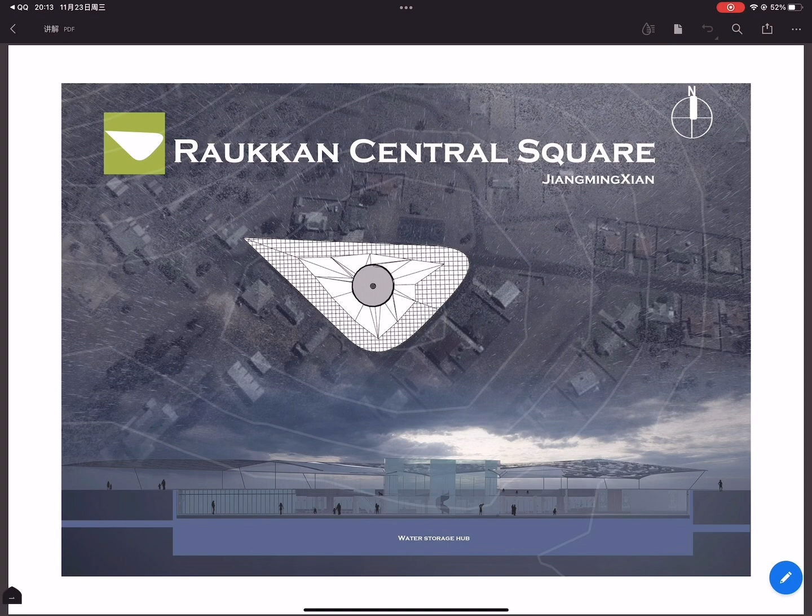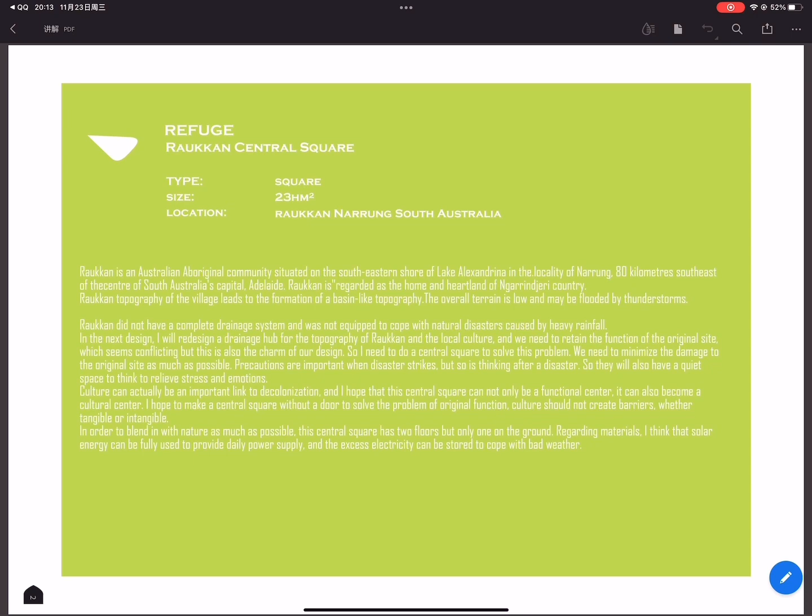Raukkan is an Australian Aboriginal community located on the southeastern shore of Lake Alexandrina, 80 kilometers southeast of the city centre of Adelaide, the capital of South Australia. Raukkan is regarded as the home and heartland of the Ngarrindjeri country.

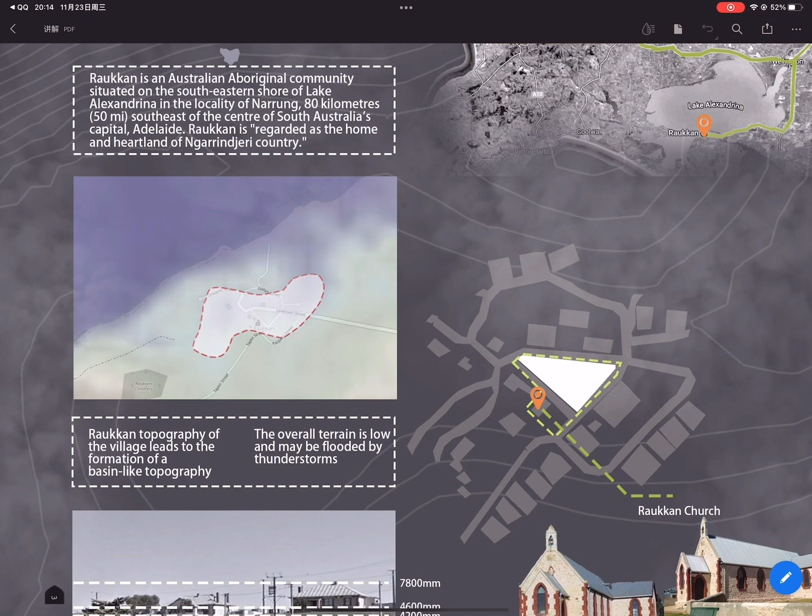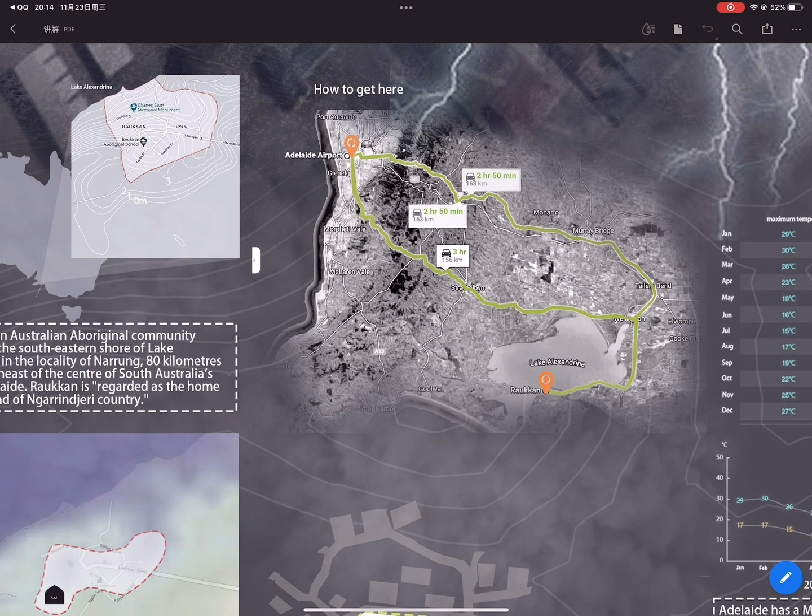The topography of Raukkan village results in a basin-like formation. The overall terrain is low and may be flooded by thunderstorms. There are two roads for people to come here from Adelaide Airport. The first is 163 kilometers and takes 2 hours 50 minutes. The second is 156 kilometers long and takes 3 hours.

Next is climate analysis of Raukkan. Raukkan has a Mediterranean climate with warm and rainy winters and relatively dry summers. Spring and fall are fairly warm day and night, with average summer highs around 28 degrees, but inland areas can reach as high as 40 degrees, and winter temperatures drop to around 15 degrees.

Rainfall in Raukkan increases from April to around July, reaching its peak. The air temperature also reaches its lowest point of the year around July. Climate in the area tends to be mild around October, but in the fall there are irregularities. Although it belongs to the Adelaide region and has many animals, after investigation there are not often large wild animals intruding here.

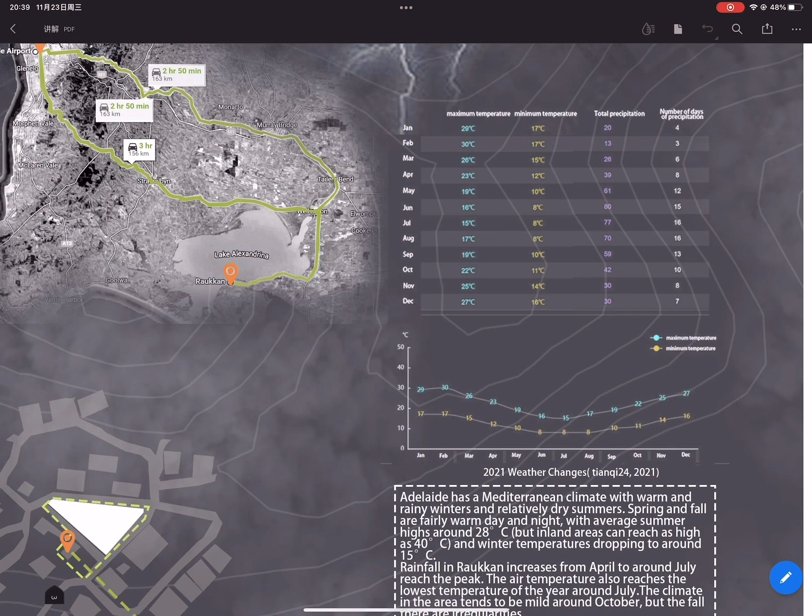After the natural survey, the next step is to analyze the topography and building height of Raukkan. The vegetation of the village is dominated by flat grass mixed with some trees. Vegetation coverage reaches 80%. The highest point of the buildings in this area is 7.8 meters, with houses lower than 3 floors.

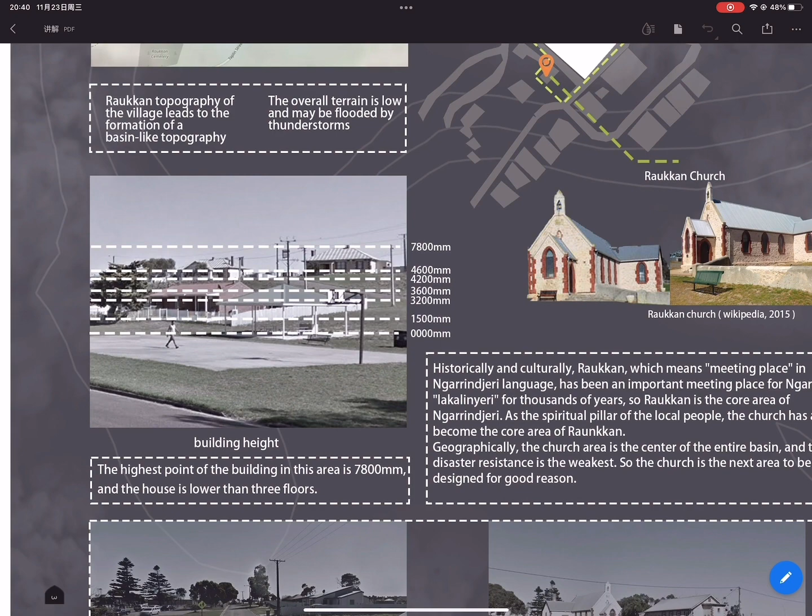After investigating the location distribution of the houses, residents in the Raukkan area have a scattered living layout with a church at the center, which serves as a culture center for people throughout the region. The next design revolves around the church and the green space at the center.

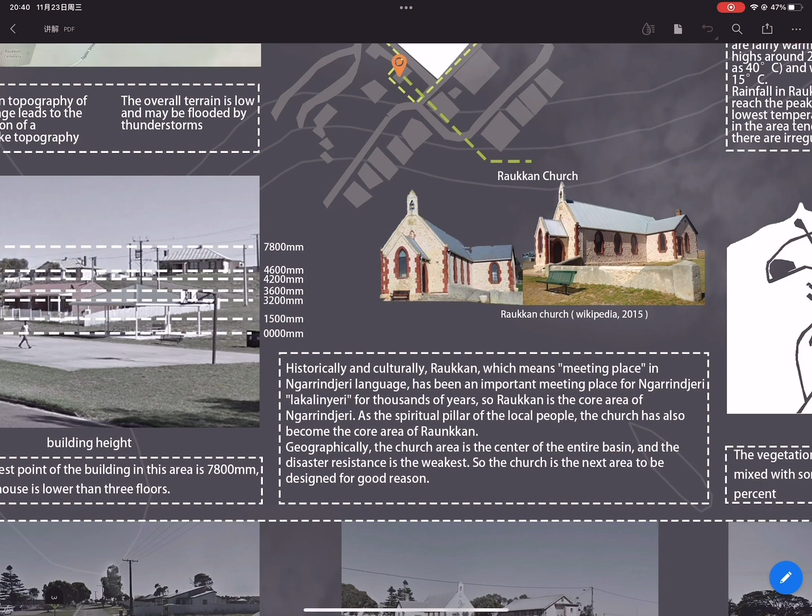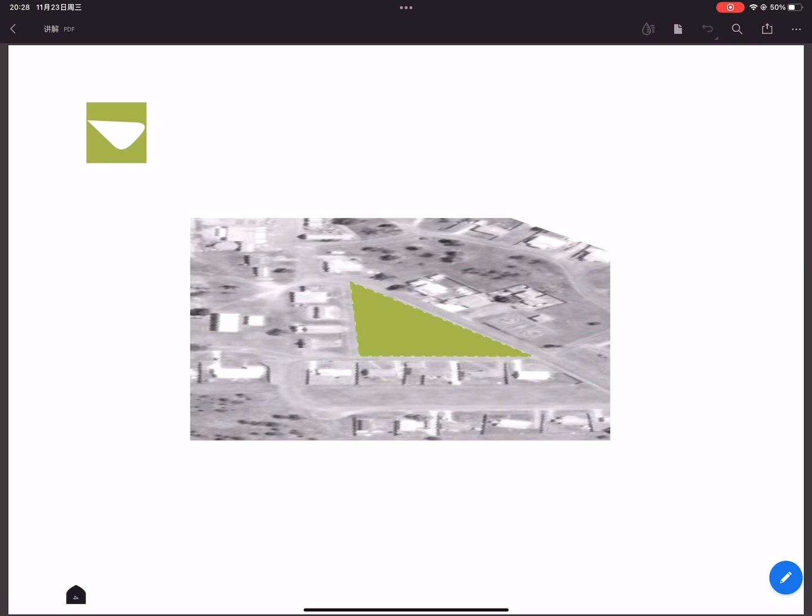According to the site investigation, there's no complete drainage system here. This part is the generation process of the model. The shape of the site is a green triangle, so I will carry out the evolution of the building according to this shape.

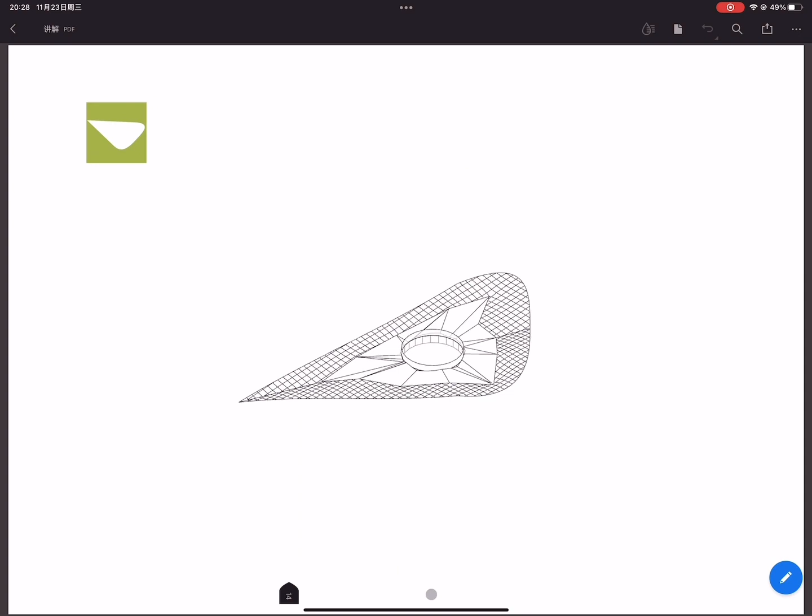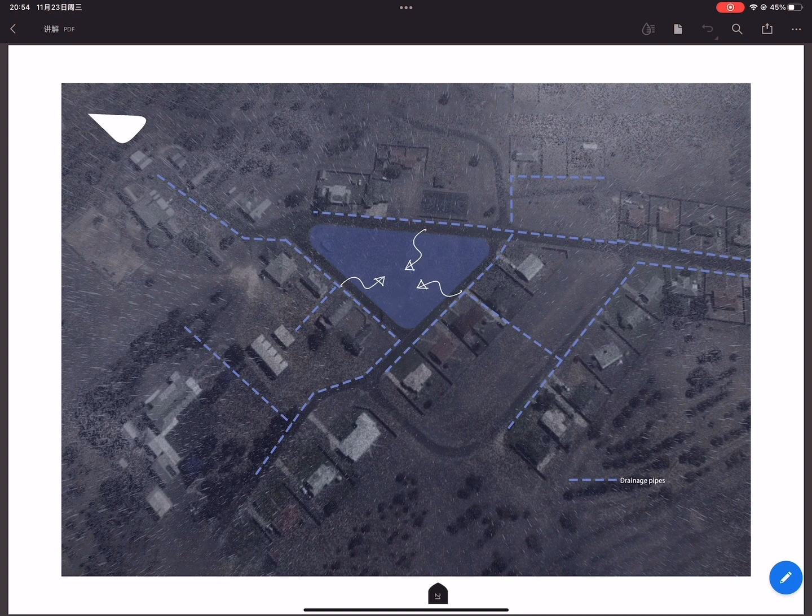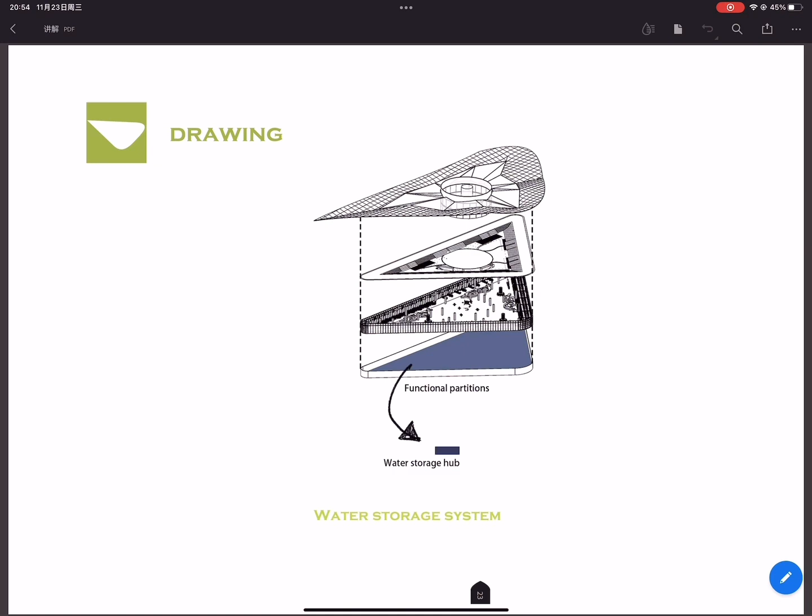The blue dotted line refers to the flow of water. I have arranged 9 drainage lines throughout the village to relieve drought and flood across the whole area. I left a distance of 300 millimeters between the top surface and the glass space for drainage. When the water storage space is saturated, the excess water will be diverted to the designed drainage system.

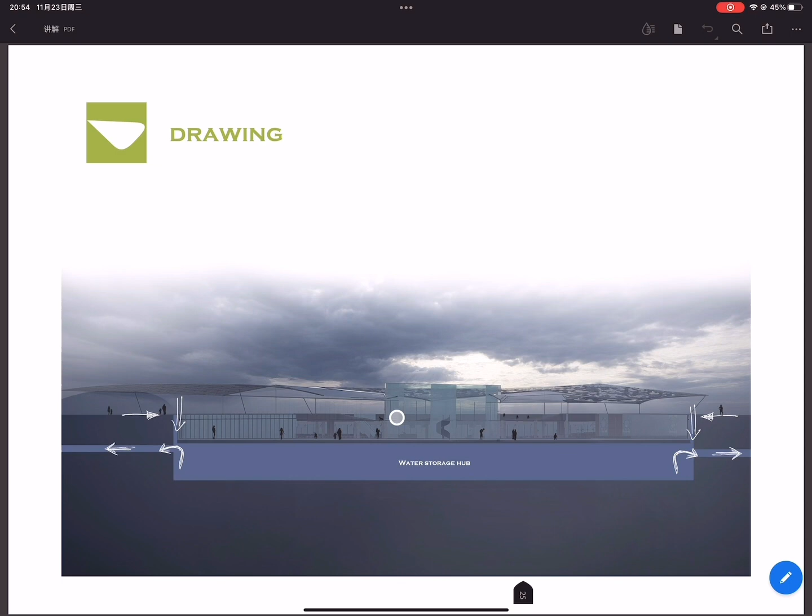On the ground, I want to blur the boundary between architecture and nature as much as possible, so it is open. In order to blend in with nature, the central pillar has 3 floors, but only one is on the ground.

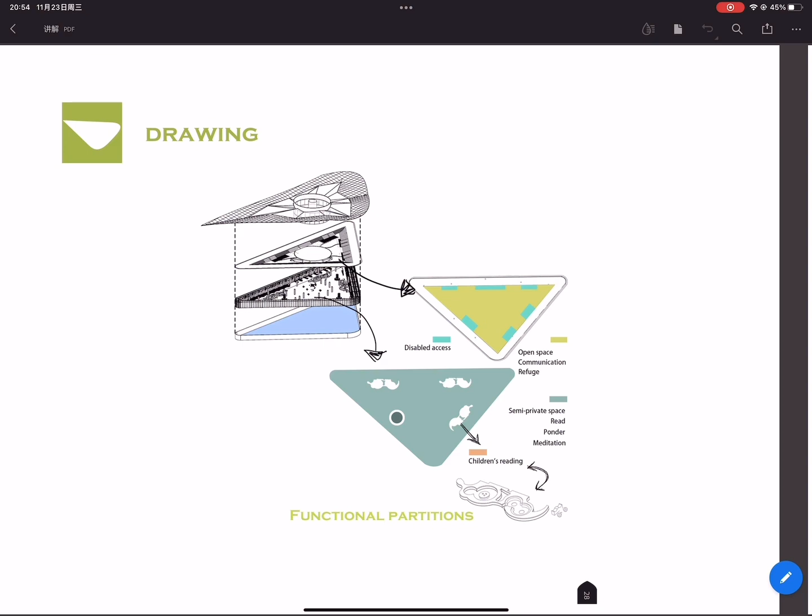The first floor maintains the original sections and has added barrier-free passages. The second floor is a space for people to read and think, with 3 children's reading and activity areas set up in it. The third floor is a water collection center, which will be open to users.

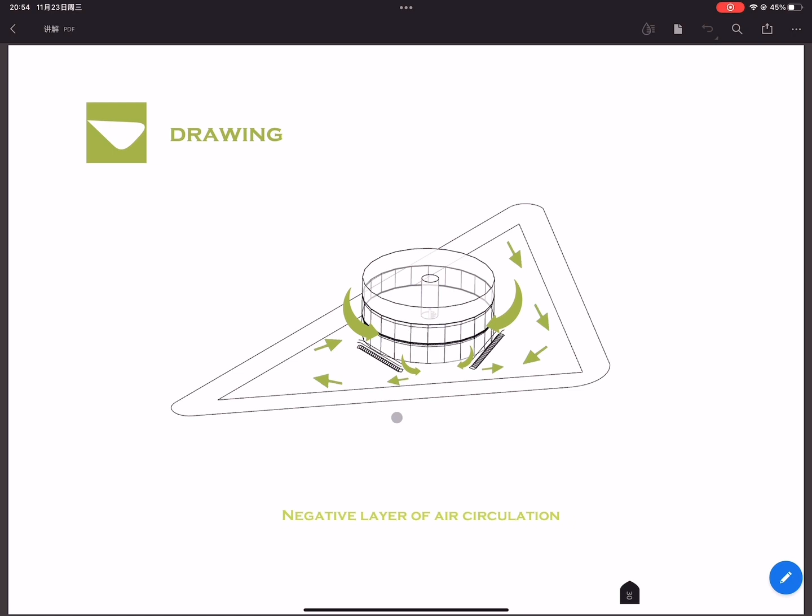This is the air circulation diagram of the whole building. This layout ensures good air circulation inside the building. My initial consideration for the material of the top surface is to use glass and transparent plastic film to ensure maximum light.

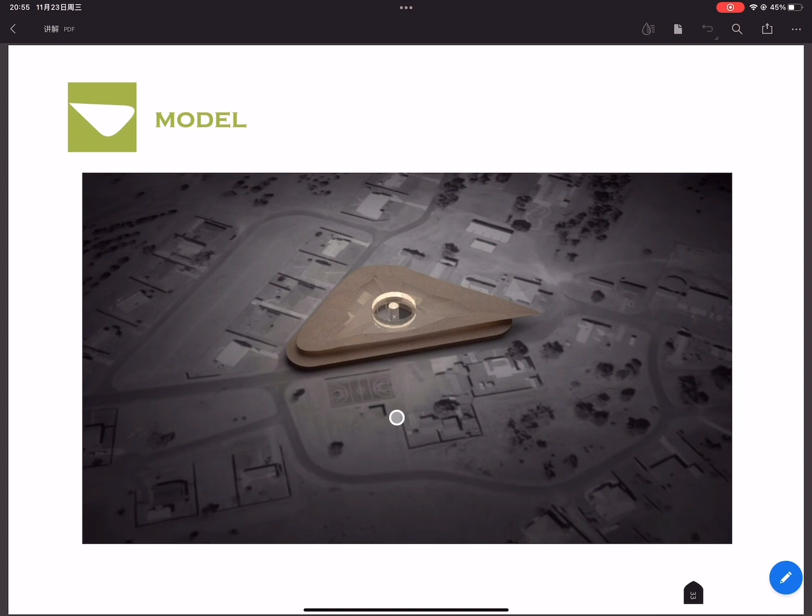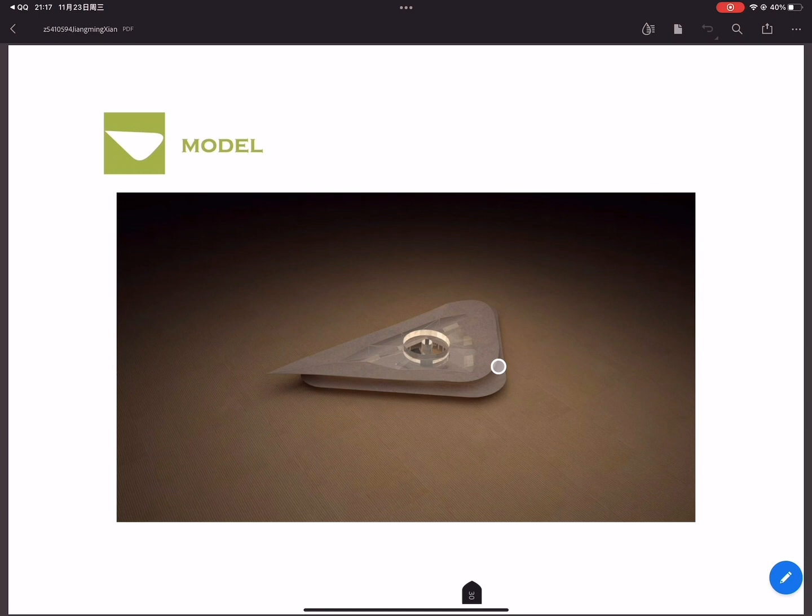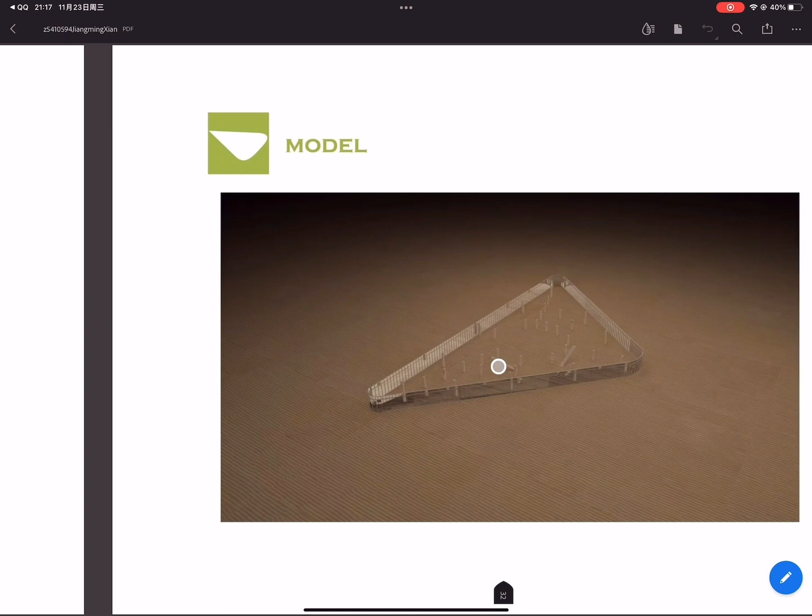I will redesign a drainage hub according to Raukkan's topography and local culture. We need to return the original function of the site, which seems contradictory, but this is also the charm of our design. So I need to make a central square to solve this problem, while doing as little damage to the original as possible.

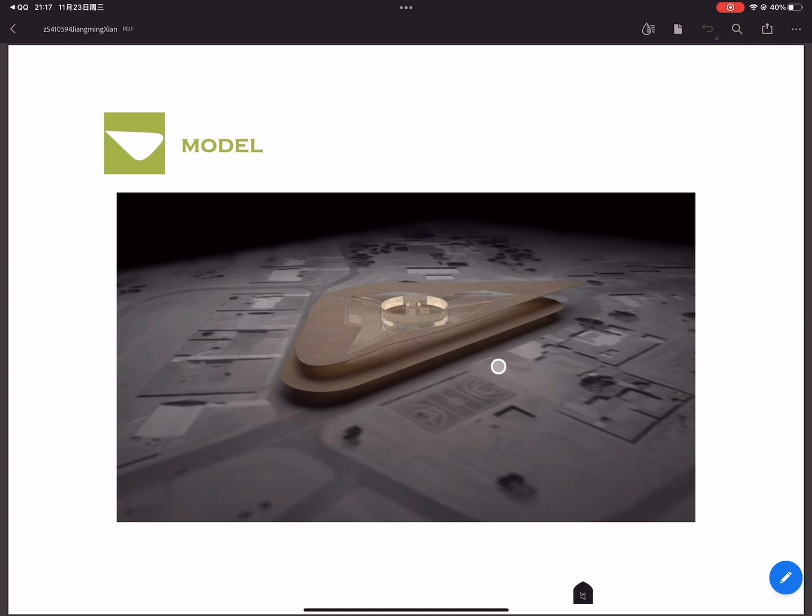Precautions are important when a disaster strikes, but so is thinking after the disaster. So they will also have a quiet space to think, to relieve stress and emotions.